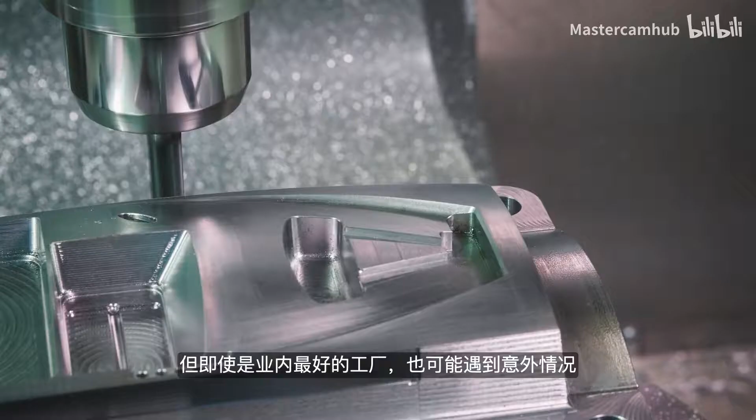Every shop strives to create perfect parts every time, but even the best in the business will have an accident now and again. In the case of our example part, this gouge was created by a retract height that wasn't properly set. Since the programmer didn't review the toolpaths and verify or machine simulation first, they weren't able to find this issue before it happened at the machine.

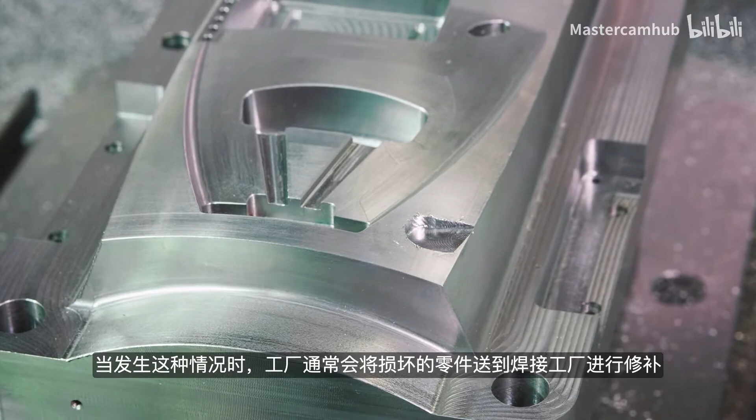When this sort of thing happens, it's common practice in many industries to send the damaged part out and have the affected area welded. Once the weld repair is complete, the part needs to be set back up in the machine so the weld can be remachined, returning the part to specification. The combination of the tools in Mastercam and the functionalities of the Haas next-gen control make this process fast and easy.

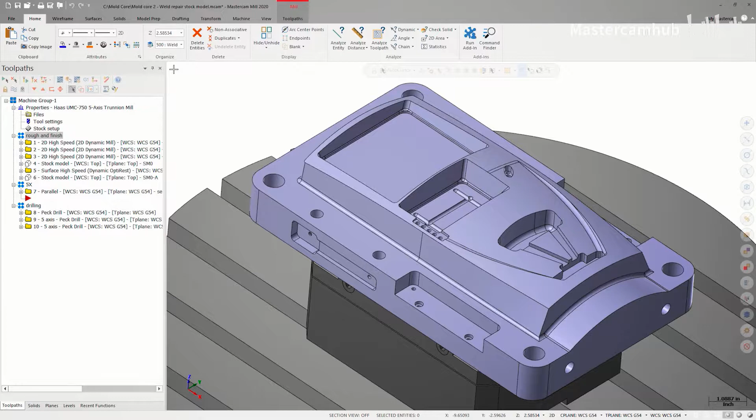Let's start by looking at the original file that was used to machine this part. Inside the file, you'll notice that there are a few roughing operations that are immediately followed by stock models. This serves two purposes. First, the stock model can be referenced by toolpaths. This means that Mastercam will create a rest machining operation that does not contain any additional or unneeded tool motion, since the toolpath knows what stock is left to cut.

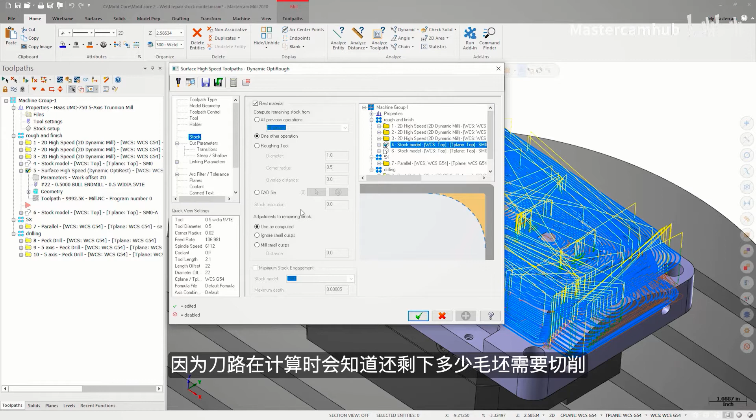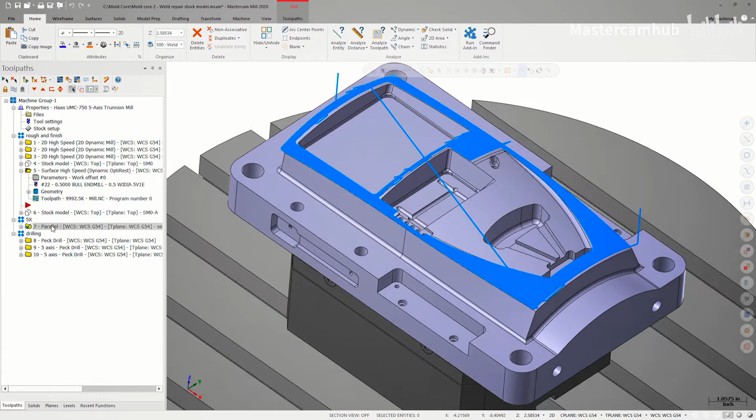Secondly, the programmer can toggle these stock models on and off, which is a helpful way to visualize the state of the part. This can help inform decisions that are made about what toolpaths could or should be used to continue processing the part. After those roughing toolpaths is a multi-axis parallel toolpath. This toolpath finishes the top face of the part, which happens to be where the repair is.

For the remachining of this repair to blend in the best, it's a good idea to utilize the same toolpath motion. In this case, we're going to end up making a duplicate of the original parallel toolpath. Obviously, we don't want to just rerun the exact same operation, since we don't need to recut the entire face. Instead, we'll isolate the area of the part that needs to be machined so the toolpath can be as efficient as possible.

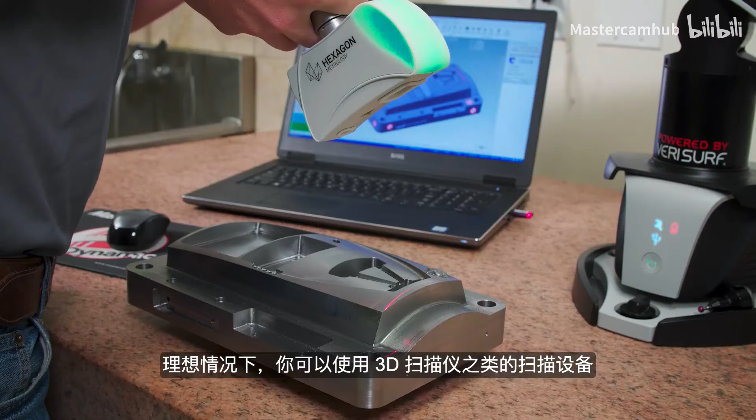Ideally, you would have access to tools like a Master3DGage with the optional scanning head. This would allow you to scan the part after it was repaired and use the resulting mesh to create drive surfaces that perfectly match the area to be machined. Of course, that's not always an option. For this example, we'll simply create some geometry in Mastercam that will allow us to isolate the welded area.

What we've done is create a simple spline that describes the outside boundary of the area we need to remachine. This boundary isn't critically accurate, but it should be enough for a simple repair. Instead of creating a new toolpath from scratch, we'll create a group below all our other toolpaths, then make a duplicate of the parallel toolpath we looked at earlier.

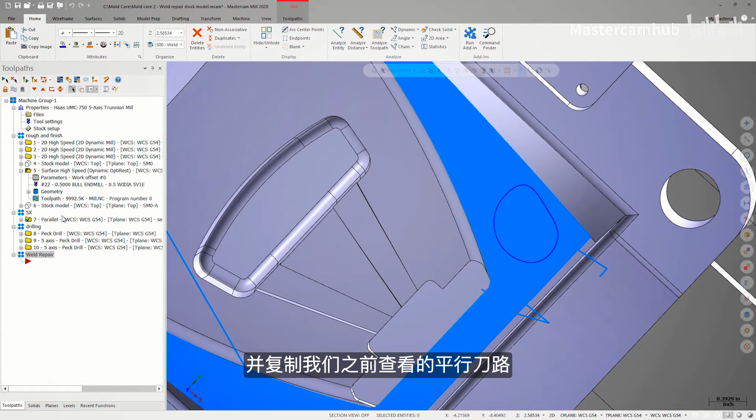Since all the original toolpaths are linked to the existing model, if we make any changes to this model, it may break links to those toolpaths. Instead, we'll make a duplicate of the model onto a new level and use that for our repair work.

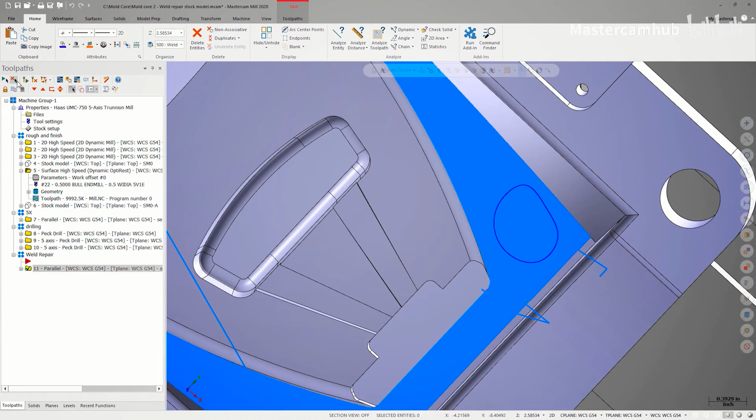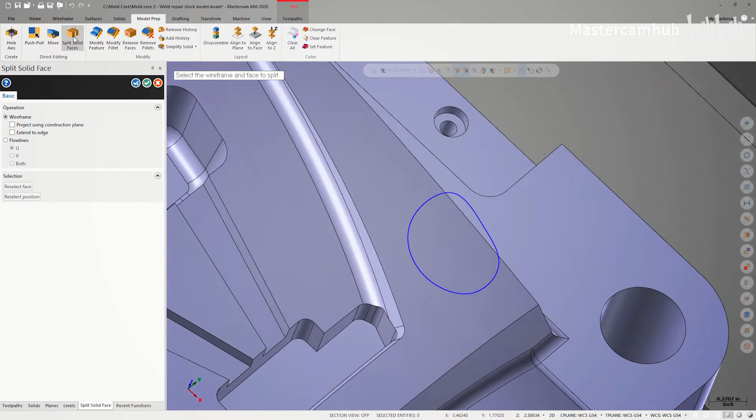Once our duplicate model is created, we'll go to the Model Prep tab and launch Split Solid Face. When prompted, we'll pick the top face of the model and spline. The spline is projected down onto the face and used as a boundary to split the solid face with. This means we now have a separate face that perfectly describes the area we need to remachine.

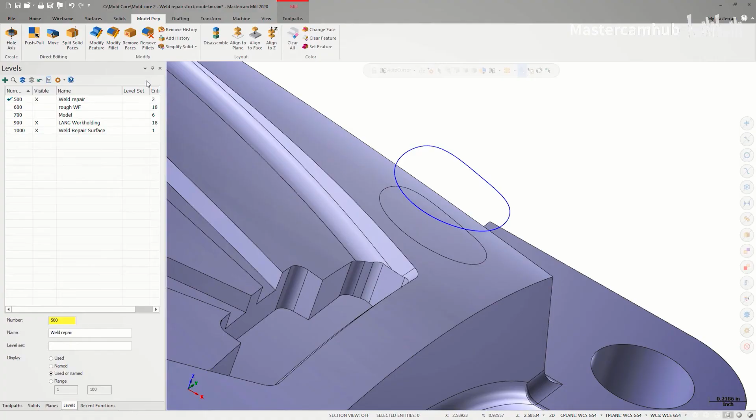Now that we have that face isolated, we're going to create a stock model from it that can be used for our rest machining. To do this, let's start by creating a surface from this face by using the Surface from Solid command.

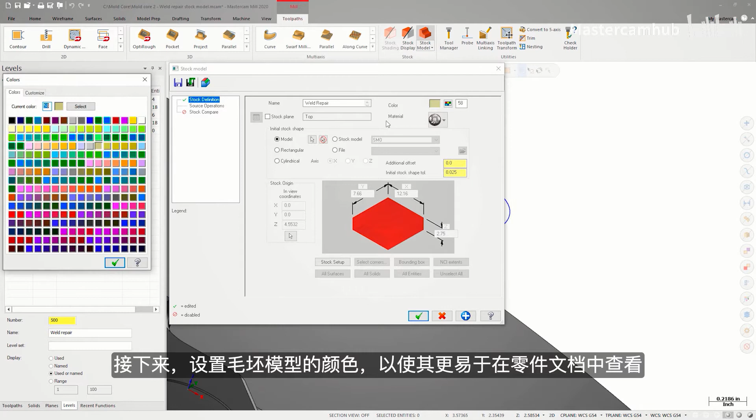Next, we'll launch Stock Model from the Toolpath tab. We'll name the stock model and pick the surface as the initial stock shape. Next, we'll change the stock model color to make it easier to see in the part file. Lastly, we'll leverage the additional offset feature.

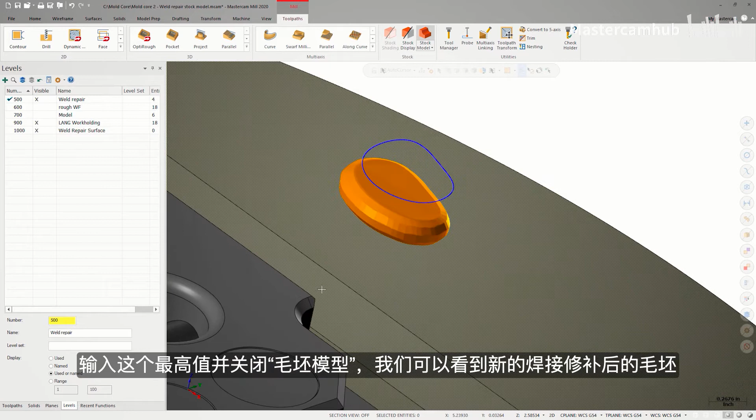To find our offset value, we'll take measurements of the height of the weld bead, making sure that we have an accurate measurement at its highest point. Once we enter that value and close stock model, we can see that the new Weld Repair stock is displayed. It can be toggled on and off by pressing T.

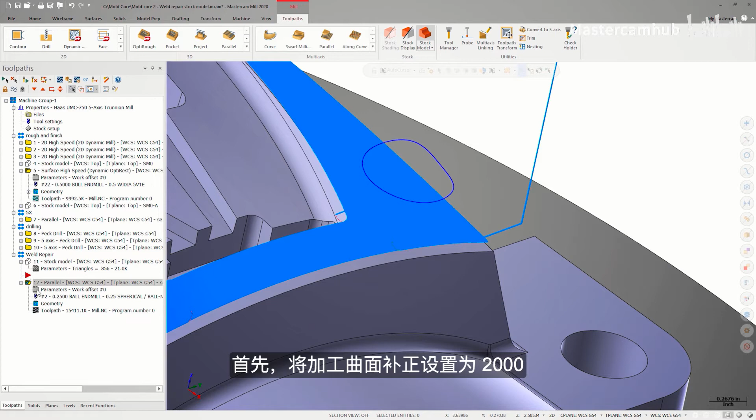Now that we have a stock model for the Weld Repair, it's time to make some adjustments to the parallel toolpath to make sure that it's using this stock model as the reference for what to cut. First, let's adjust the drive surface offset to 2 thousandths. This will leave a little material on the part, which is always a good idea when remachining. It allows you the opportunity to slowly adjust the toolpath to sneak up on a good blend with the existing part. On the stock page, we'll enable stock and choose the Weld Repair stock model as the source.

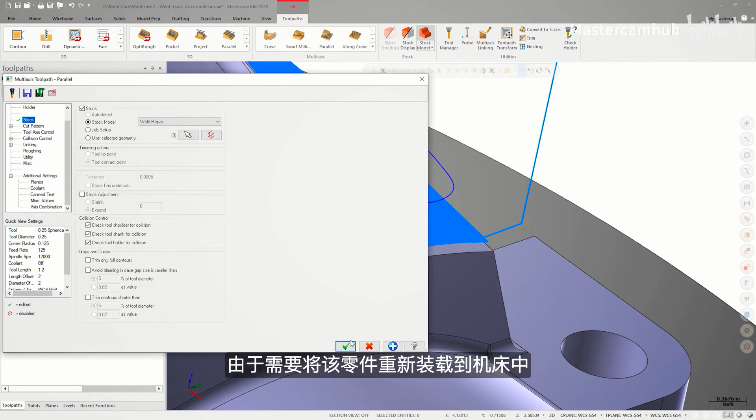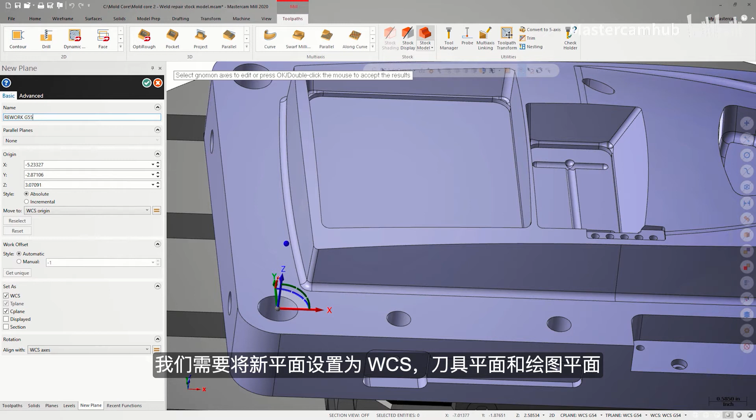Because this part is going to need to be remounted in the machine, we're going to need to be able to locate it during our part setup. Our original G54 plane might not be ideal for this, so we'll create a new plane called Rework G55 that will allow us to pick up the part location from one of the hole features on the part. We also want to make sure we set this new plane as our WCS, tool, and construction planes.

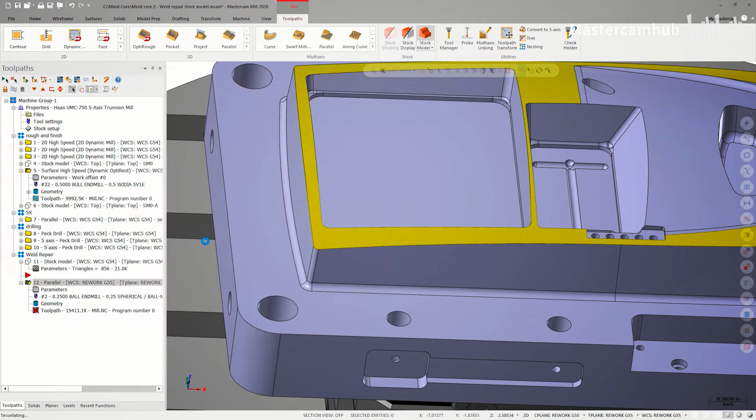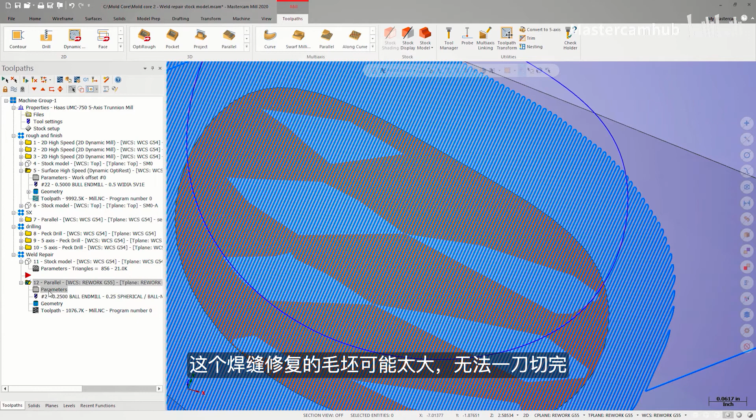We can now regenerate the toolpath. Note how the toolpath is limited to the area we need to cut, and if we turn on the display of the original version of the parallel toolpath, the stepovers line up exactly. This Weld Repair might be a little too much stock to take off in one pass. Let's go back into the parameters, and on the roughing tab, enable depth cuts. We'll set the number of cuts to 2 with a spacing of 20 thousandths.

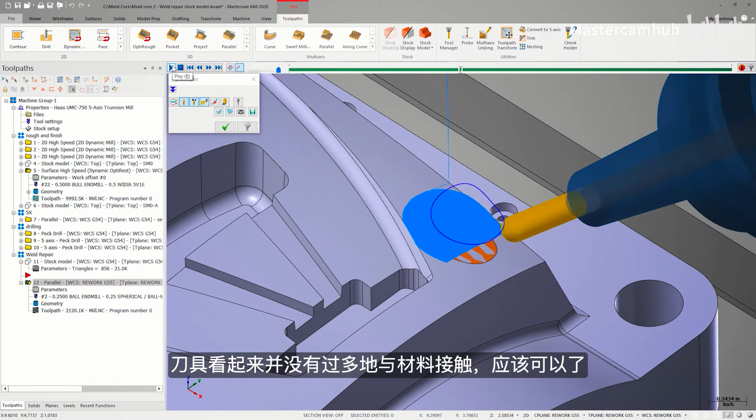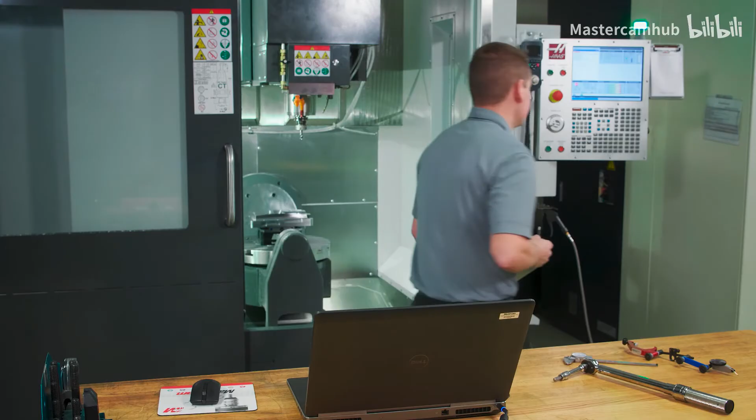With the toolpath regenerated a second time, we can review it in backplot. The tool does not look overly engaged in the material and should be ready to go. Let's post out the code and get the part set back up in the machine. Let's start by loading the part back in the machine.

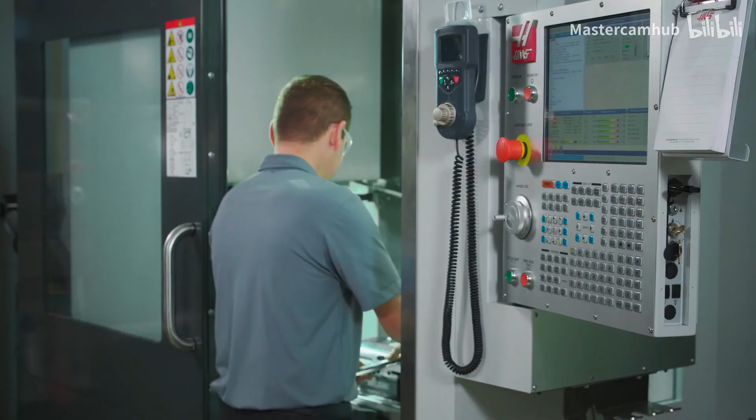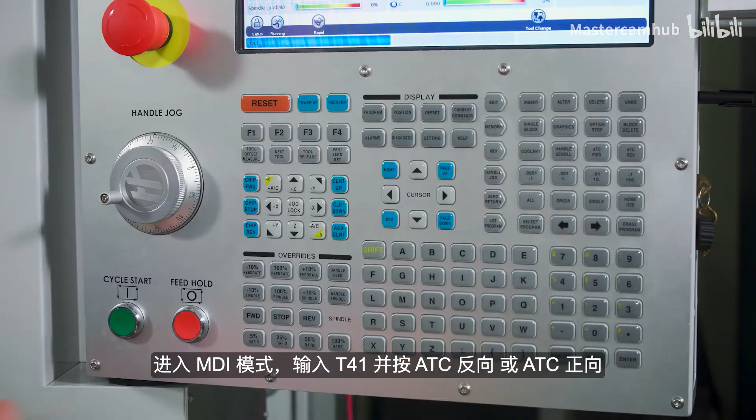Next, we'll manually call up tool 41, which is our probe. We'll go into MDI mode, type T41, and press either ATC reverse or ATC forward. Once the probe is in the spindle, we'll jog the probe over and down inside the approximate center of the locating bore that we chose as our G55 location in Mastercam.

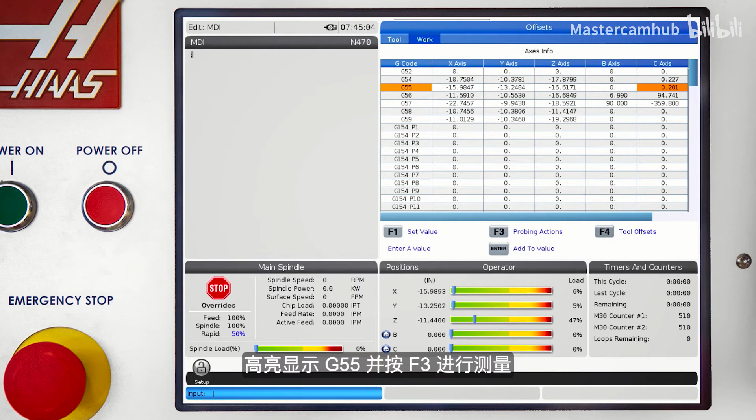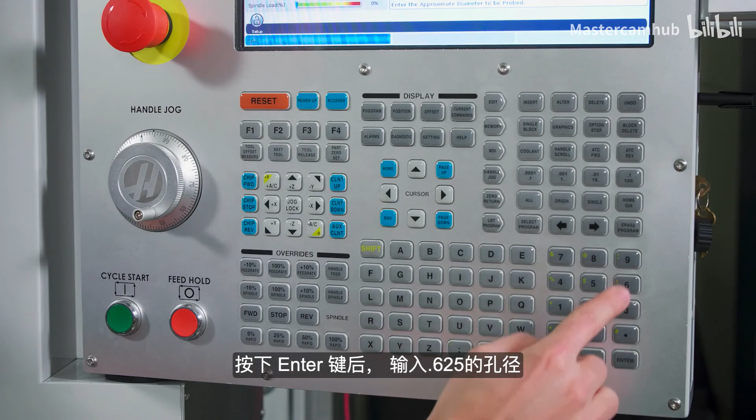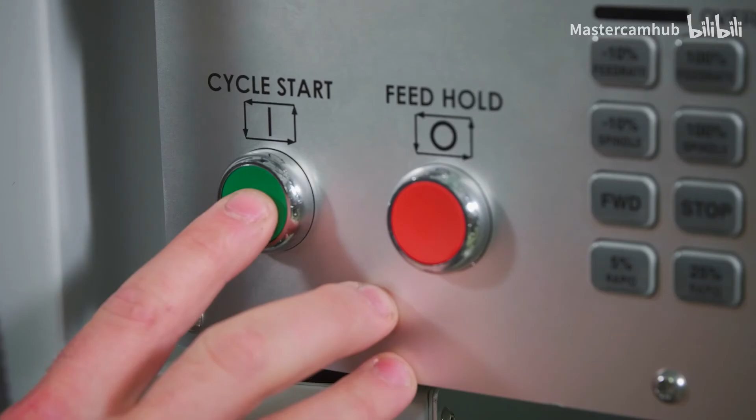Now we'll press the offset button and navigate to the work tab. Highlight G55 and press F3 for probing actions. In this case, we can use the bore cycle. After pressing enter, we'll enter the bore diameter of 0.625. That will populate a macro that I can run in MDI by pressing cycle start. This automatically populates the G55 work offset with the correct X and Y values, but we still need to set our Z.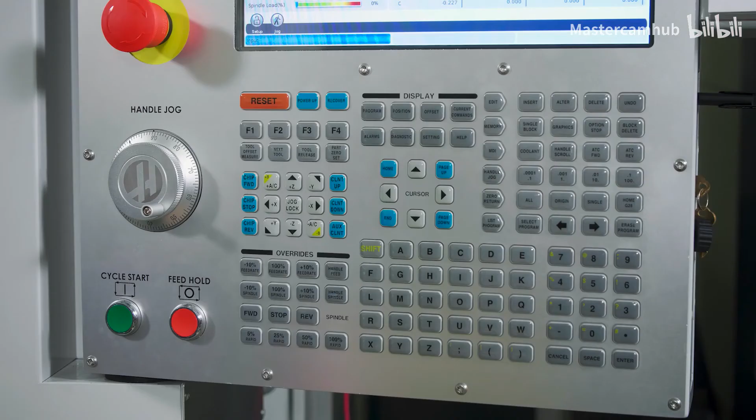We'll do this by using the single surface routine. Picking up a part location doesn't get much easier than that. Now all that's left to do is load the program and machine the part.

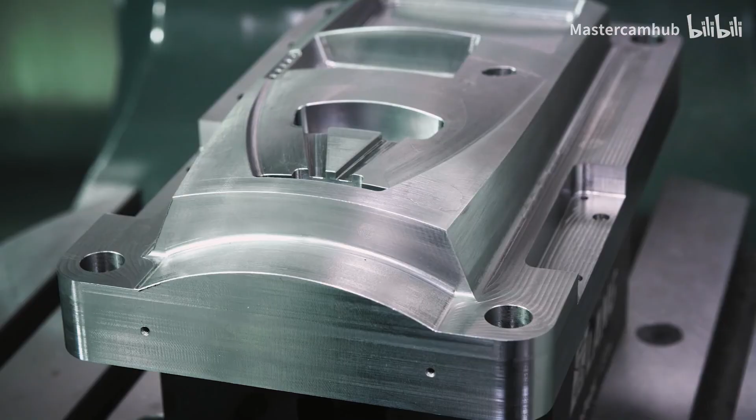We hope you've enjoyed this quick look into setting up a remachining toolpath in Mastercam and using the wireless intuitive probing system in your Haas Next Gen control. And remember, this process isn't just for multi-axis machines. This same process can be used on any 3D toolpath as well.